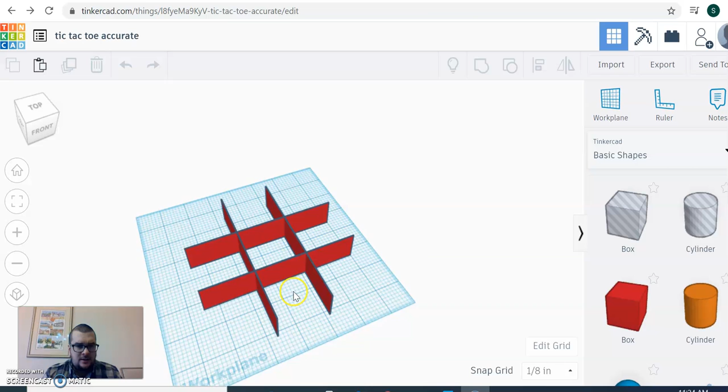Hello everyone, today I'm going to show you how to make a tic-tac-toe board in Tinkercad. When it's done, next week we can use a laser cutter to burn the lines onto a piece of wood and make a tic-tac-toe board. This is what your end result should look like, except for whatever that thing is. So we're going to go ahead and start a new design.

Okay, so the first thing you want to do is change your file name to make it much easier for me for grading and printing and engraving. So, let's say whatever grade, 7th grade.

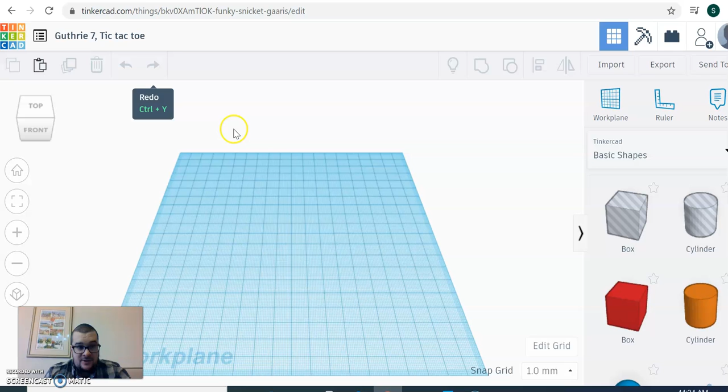Tic-tac-toe. Okay, the very first thing you need to do, or you'll mess the whole project up, go to where it says Edit Grid, and we're going to change it from millimeters to inches. So now we'll be using inches instead of the metric system for this project.

Once you do that, do not click X. You must hit the blue button that says Update Grid. Right now, you see down here, we are now in inches, so we can start working.

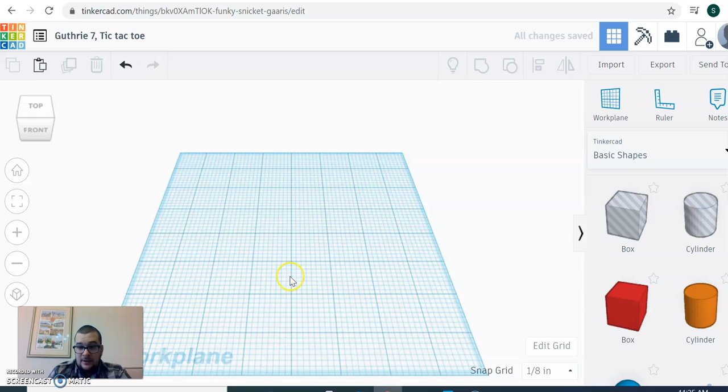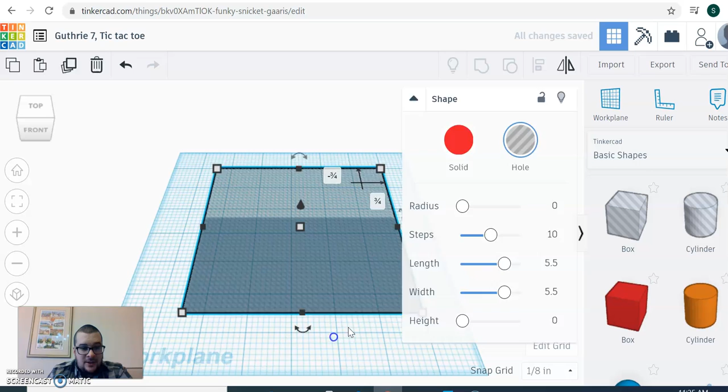The first thing you want to do next is get a hollow box, and you're going to make it 5.5 length, 5.5 width, and height you're actually going to set to 0. The point of this is just to help us design our actual tic-tac-toe lines. This is kind of the exact shape of the wood we're going to be using, so you know this is going to be the edge of each side.

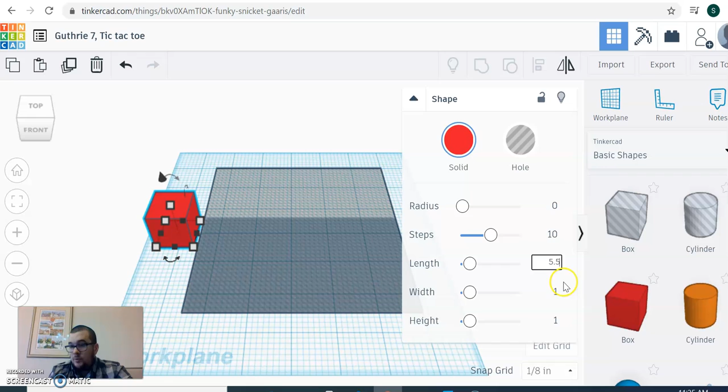So next, I'm going to create another box. This one is going to be not hollow. We're going to make it 5.5 inches long, 0 inches wide—you got to be very specific with this, do not use the wrong measurements—and then for height, we do want it 1 inch.

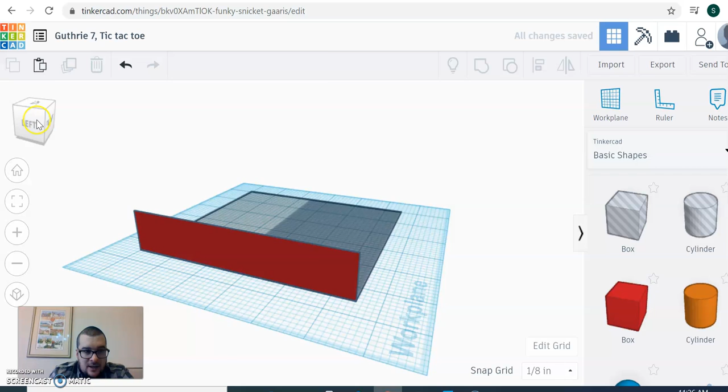Now what we want to do is take this line and line it up so it's just like that. So what we need to do next is move this line 1.83 inches to the right.

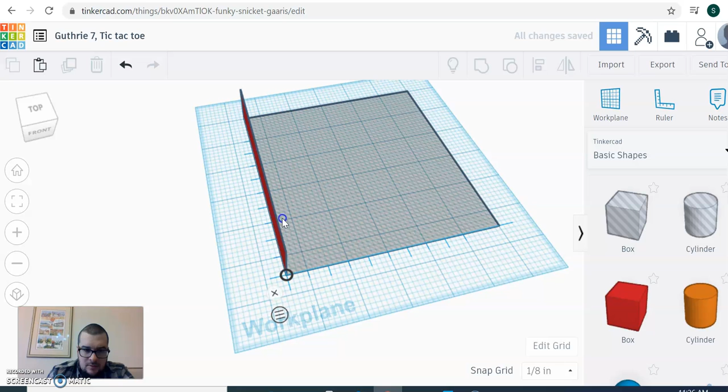There's a few ways we can do it. First, I'm going to go ahead and put a ruler there. So I'm going to start moving it, and then I'm going to click this box and type in 1.83, and it's going to move it there all the way for us.

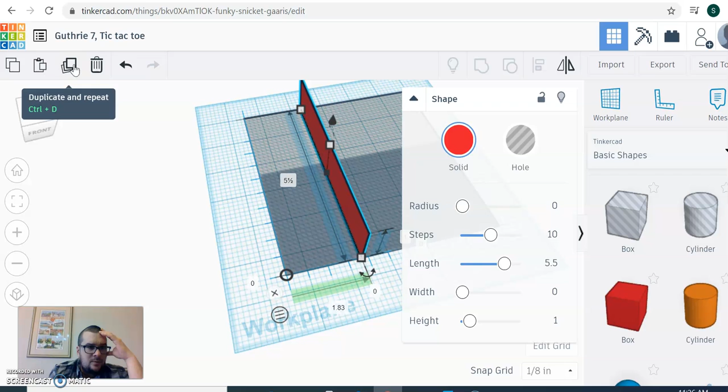Next, we're going to duplicate and repeat, so now we have 2 of these boxes right here. We're going to click one and slide it over. Now we need to slide it over another 1.83. So what we can do is move the ruler to this line, and now we can make that 1.83.

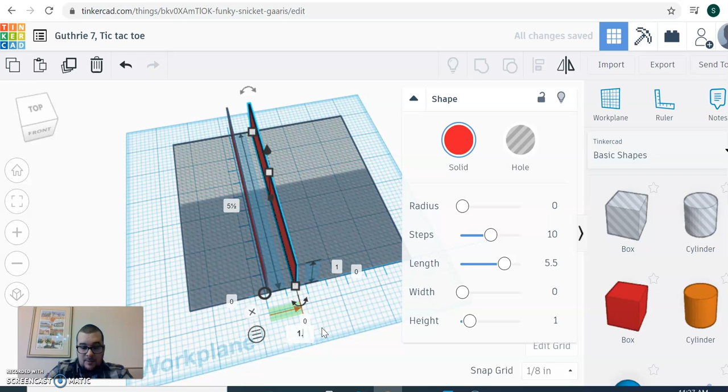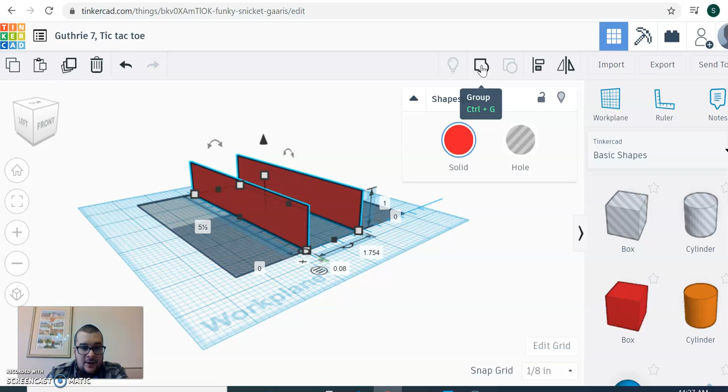So now those 2 are where they need to be. Next, we're almost done. I'm going to just select the 2 boxes together, and then we're going to group them with this button over here. So now they are one item together.

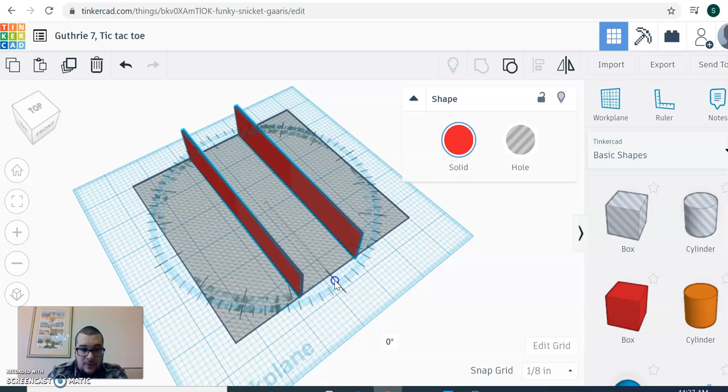Once you do that, you can hit the duplicate and repeat button, and we are going to rotate—let me turn the ruler off. We're going to rotate one of these 90 degrees. Remember, when we rotate, you want to click on an arrow. You want to use these interior lines here to make sure it locks in at 90 degrees specifically.

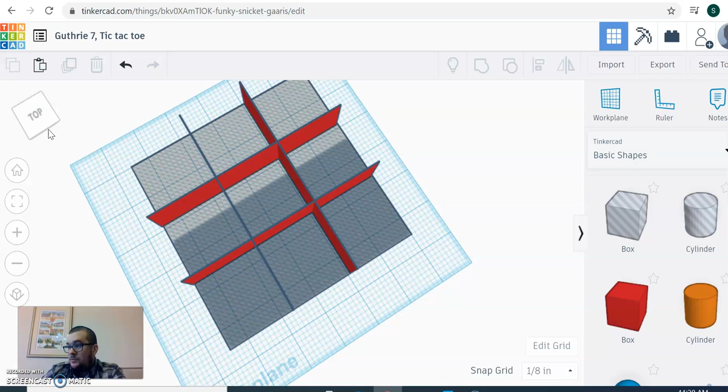Or I think you can also type in 90 and it'll spin it for you. And now you have our piece of wood divided up perfectly into the tic-tac-toe boxes. Now all you have to do is delete that one, and now you have your overall design.

I'm going to group mine all together just so nothing gets messed up. Now that is how you do that. Next, what we're going to do—actually, I'll do a separate video for the game pieces. So that's all we're doing for this step.